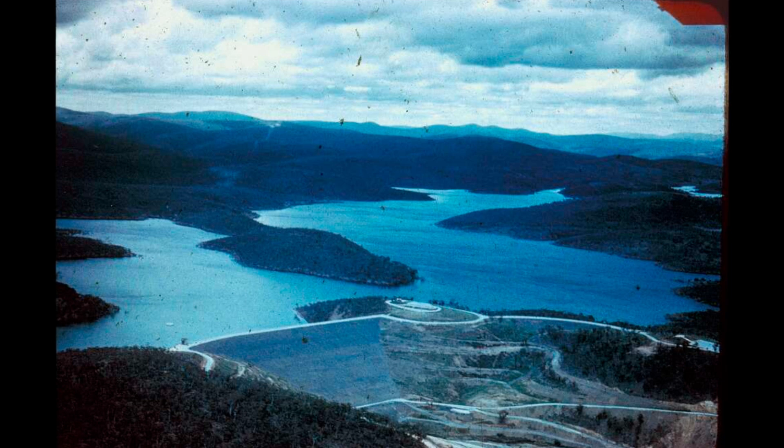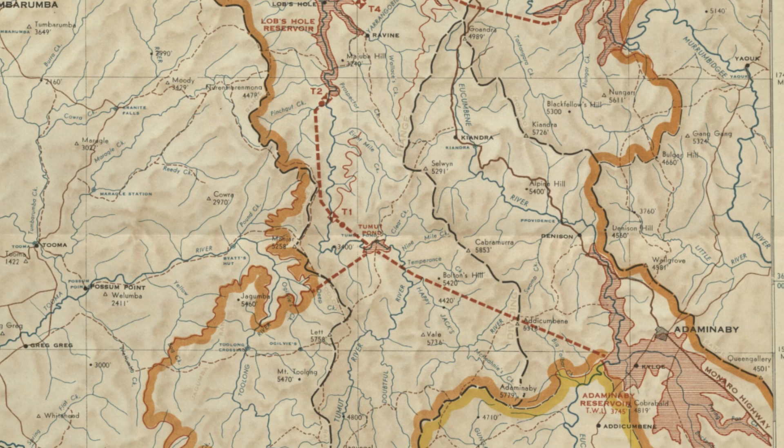The Eucumbene dam site, shown here, will be the final agreed location some 7 kilometres approximately downstream on the Eucumbene River from the initial proposed location in earlier plans. The earth-filled dam works would be underway as of 1956, and filling of the reservoir would take place in advance of the dam itself reaching its final crest height in 1958.

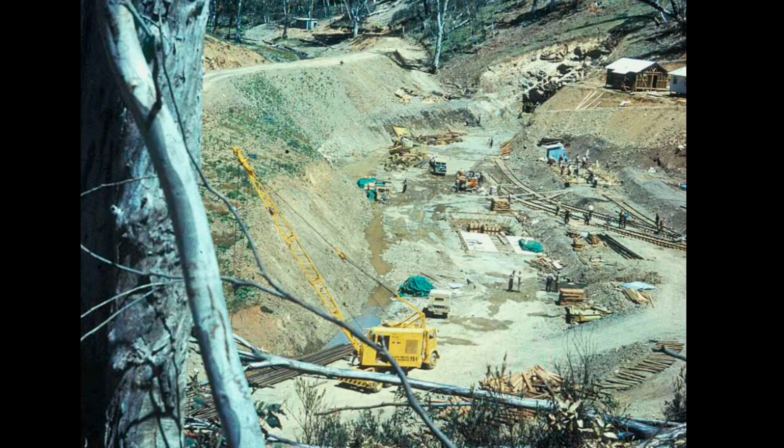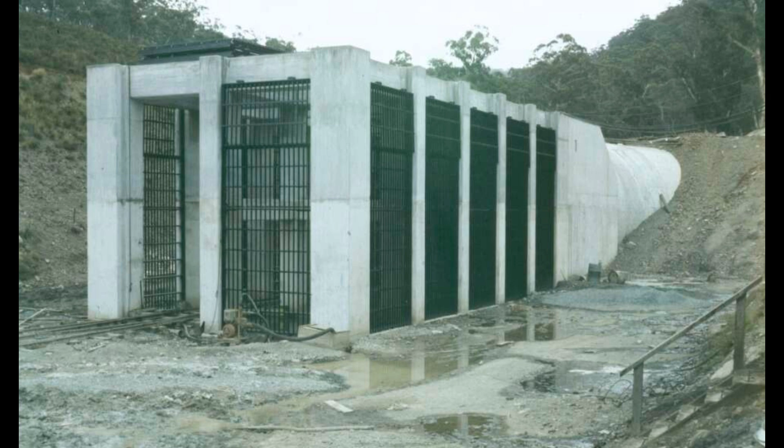For water to leave the lake and enter the Snowy Tumut system, an outlet portal and control structure were built on the Tooma Inlet, approximately 6 kilometres north of the dam site. This structure would serve both as an outlet and inlet to Lake Eucumbene, with a nominal second outlet portal and control structure being provided downstream for its connection with Tumut Pond Dam.

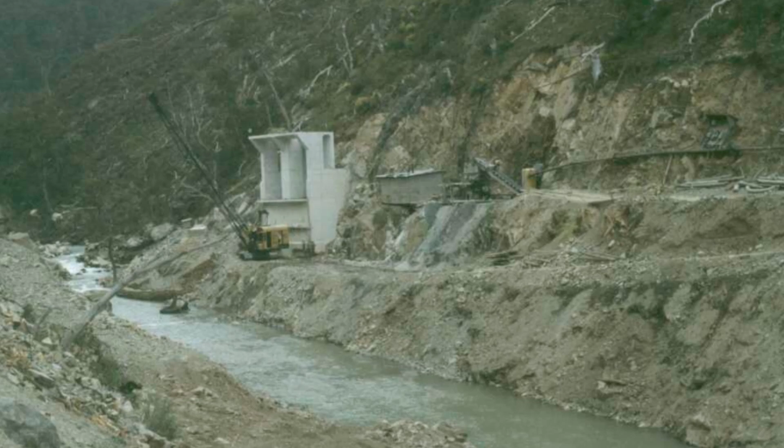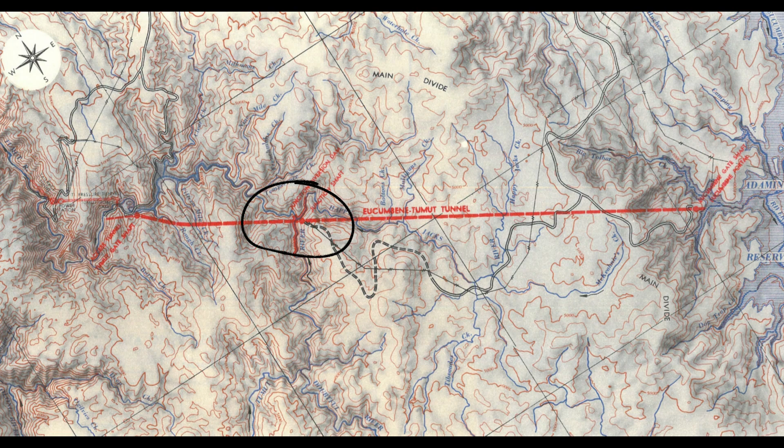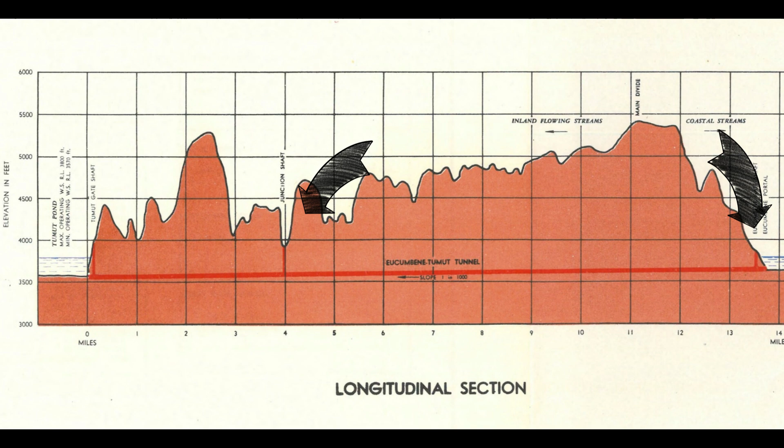The reason the Tooma Inlet structure serves as both an inlet and outlet structure is due to the junction shaft being located 3/4 along the Eucumbene-Tumut tunnel alignment. This intermediate intake is at a much higher elevation than both Tumut Pond and Lake Eucumbene, permitting reverse flows to occur.

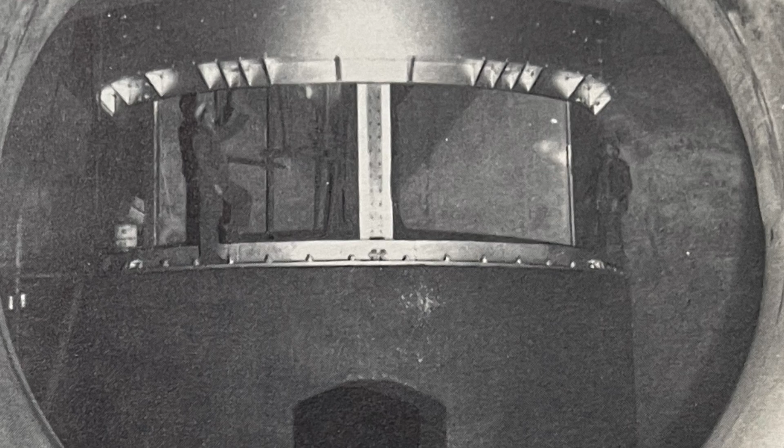Junction shaft and its cylindrical control gate is coupled with Happy Jacks Dam, which holds back the Tumut River in its upper reaches. Without this intermediate intake, high seasonal flows would likely cause Tumut Pond downstream to overflow via its spillway, and water available for long-term storage would be lost through uncontrolled flow through the lower scheme.

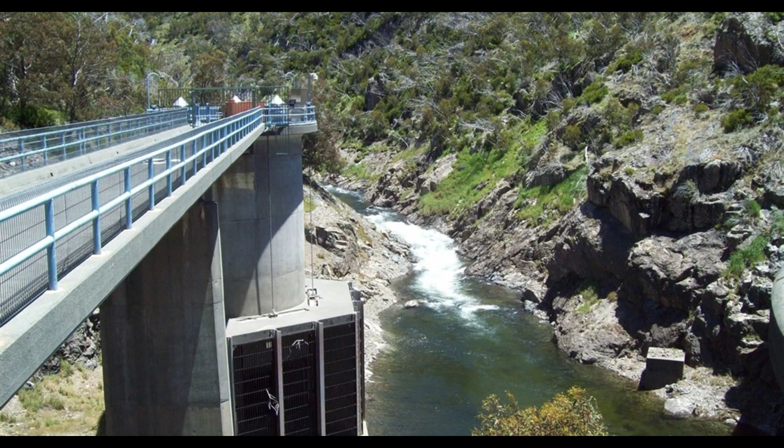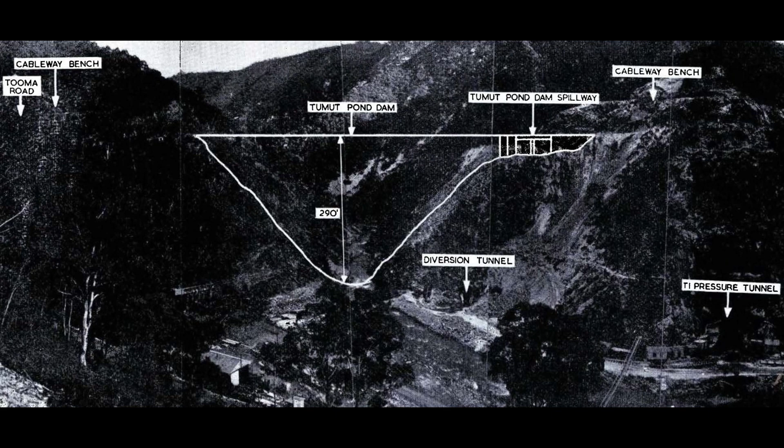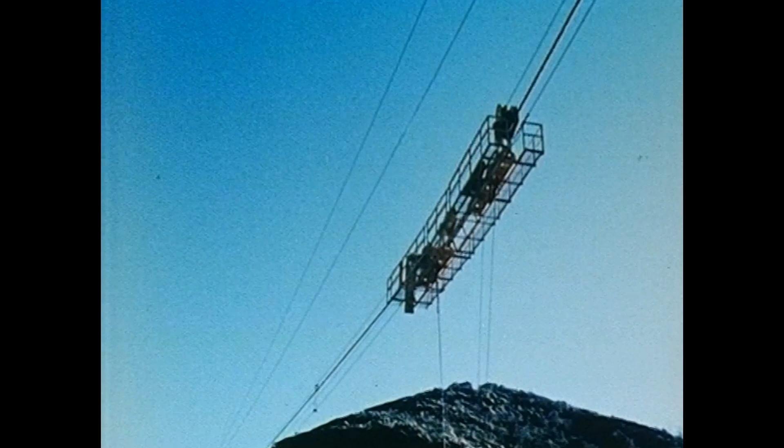One year after commencing construction of Eucumbene Dam, Tumut Pond Dam's construction would take place in 1955. This dam would impound the Tumut River below Happy Jacks Dam and create the storage which would feed the first power station within the Snowy Tumut scheme, Tumut 1. Tumut Pond Dam would be a concrete arch dam similar in nature to that of Hoover Dam, but to only a fraction of the scale.

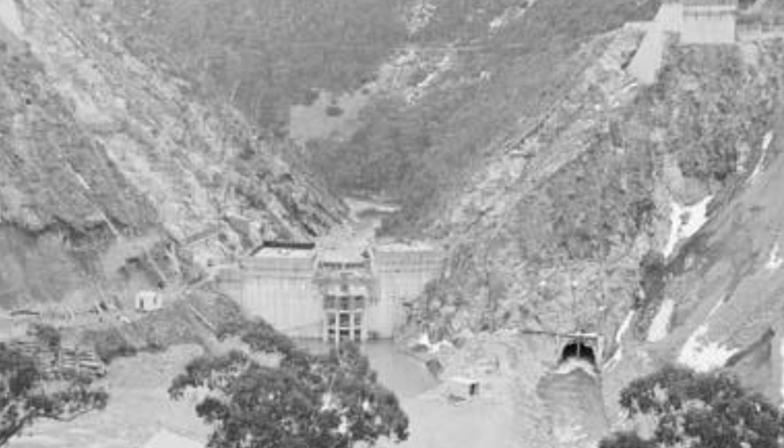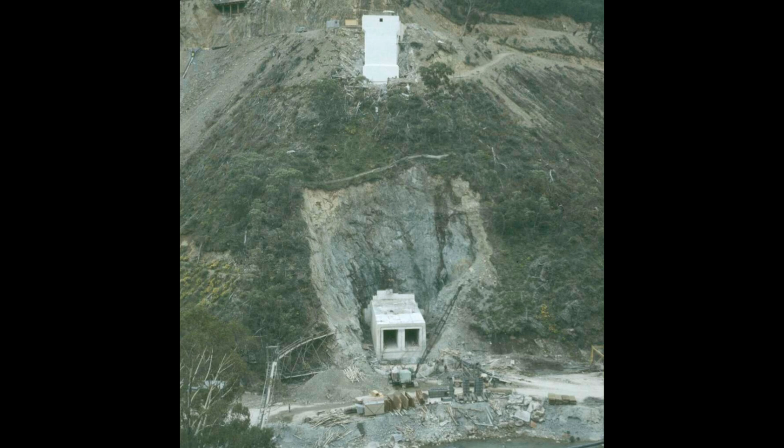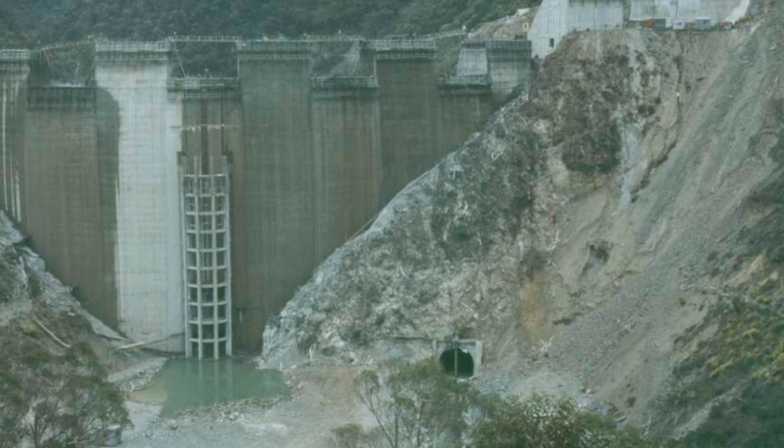And like all other storages, it would require a diversion tunnel be driven through the right side abutment to permit construction to commence. Further upstream of this diversion tunnel, works would also start on driving the outlet tunnel and building the control structure from the Tumut Pond storage towards the Tumut 1 power station below ground, some 2.5 kilometres downstream under the mountain range. Work on the dam itself would progress over 4 years, block by block, growing it upwards to its final height of 86 metres.

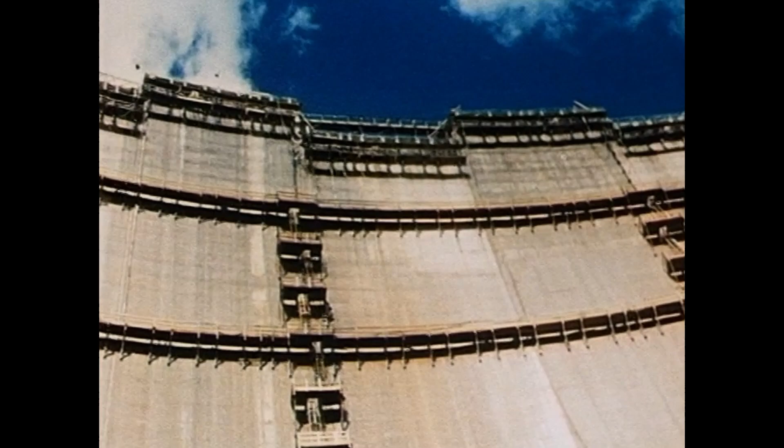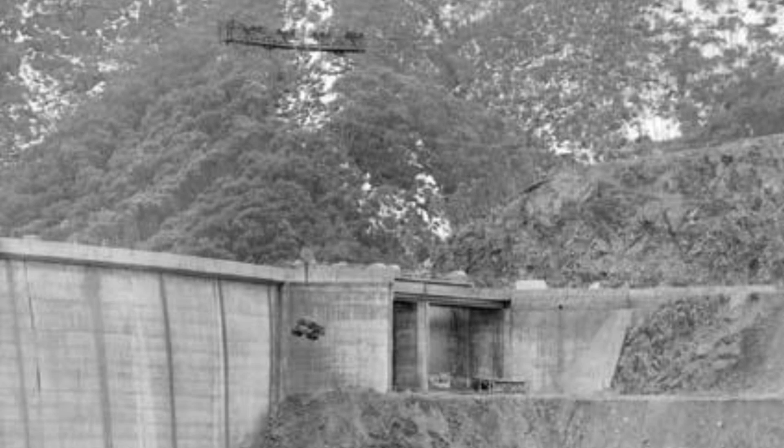The cable transport system would ferry everything from workers, concrete, and even large plant equipment such as this bulldozer across the valley. The image begins to show the scale of the dam and the associated works.

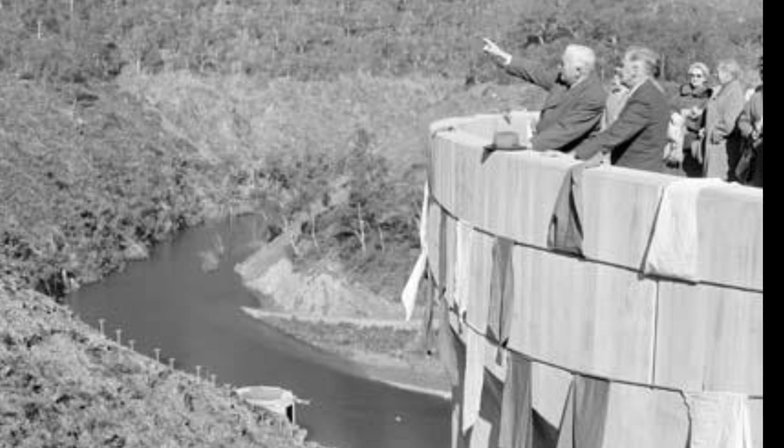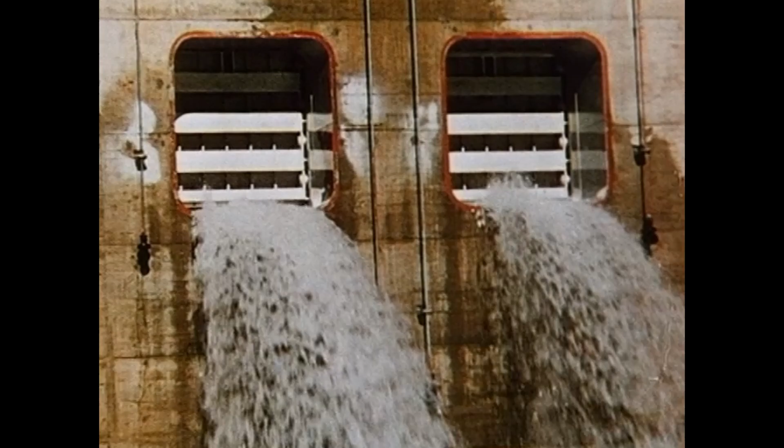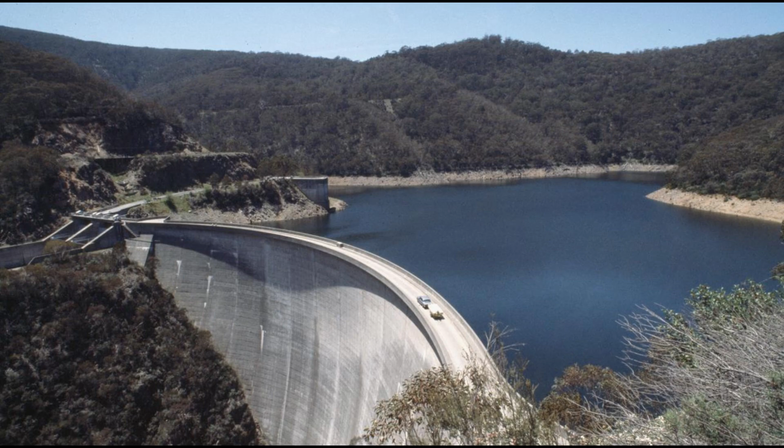By late 1958, Tumut Pond Dam was in a position to hold its opening ceremony, and the outlet gates were closed to enable filling to begin whilst minor works were finished. Here, Prime Minister Robert Menzies pulls a lever to close the outlet gates and commence storage operations. The finished dam not only holds back the Tumut River, but serves as a key access road between the townships of Cabramurra and Khancoban to the south.

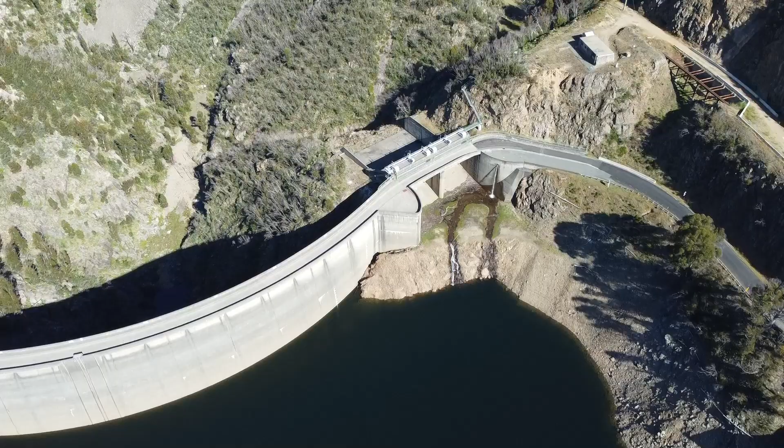The dam itself is a visual marvel and impressive to visit when travelling through the Snowy Mountains, with the outlet structure observable from the dam wall and spillway gates within easy walking distance of parking at the site.

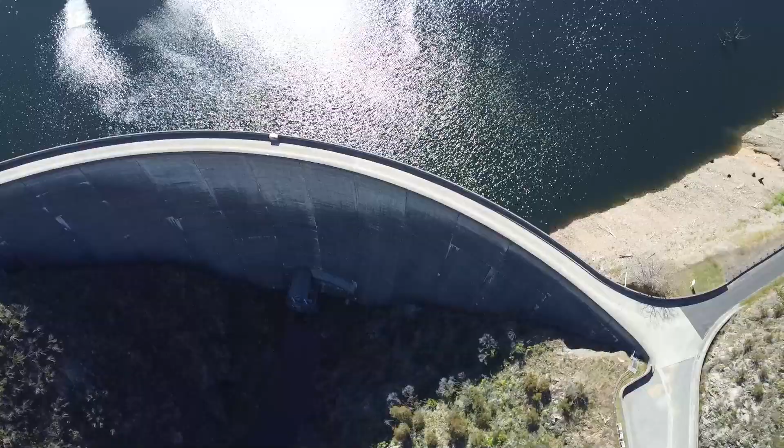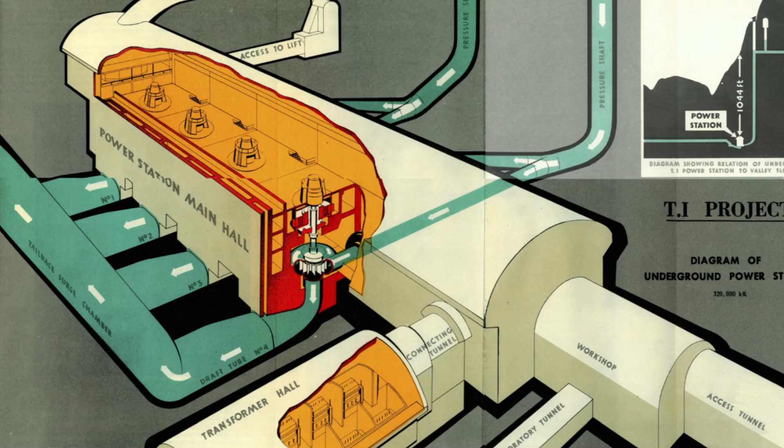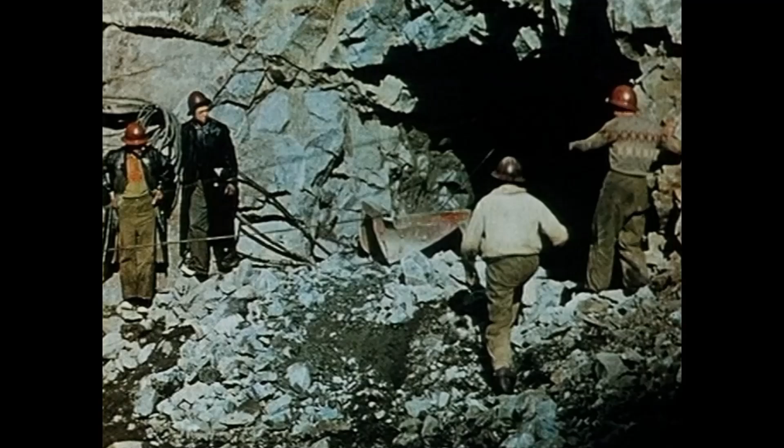Early works had commenced prior to 1955, with an investigational tunnel being driven into the mountain range to understand geological conditions and support its design development.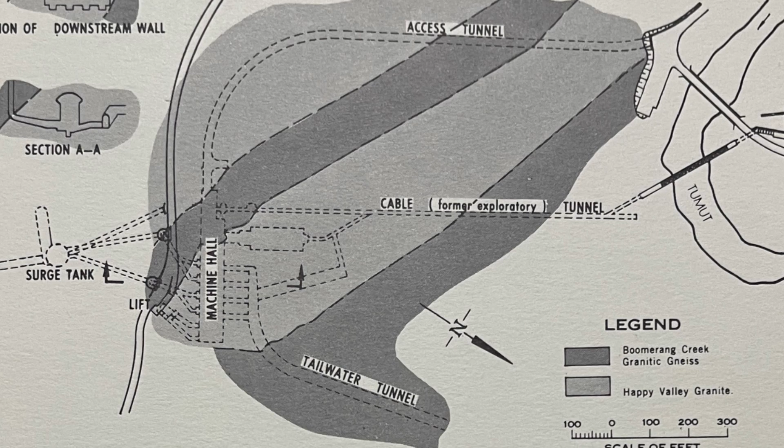It turned out that after initial excavation into the machine hall began, ground conditions were not favourable, and a decision was made to extend the machine hall a further 30 metres into Happy Valley granite, which was more sound, as can be seen in this diagram.

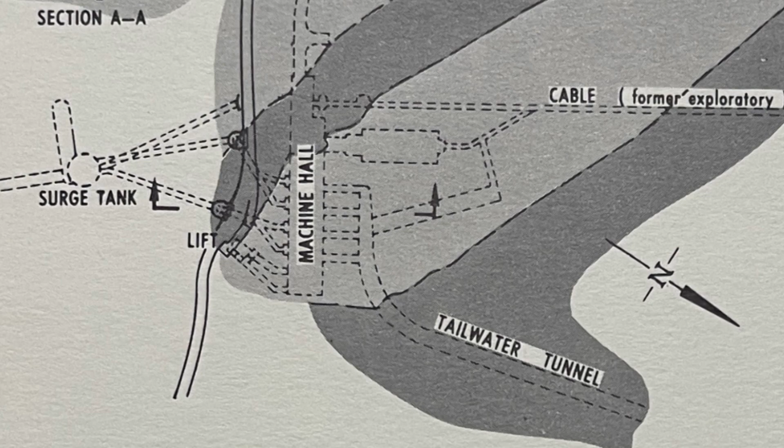Vertical pressure shafts were used due to them requiring the least excavation and material for lining, and a surge tank arrangement was provided upstream of control gates leading into the vertical shafts.

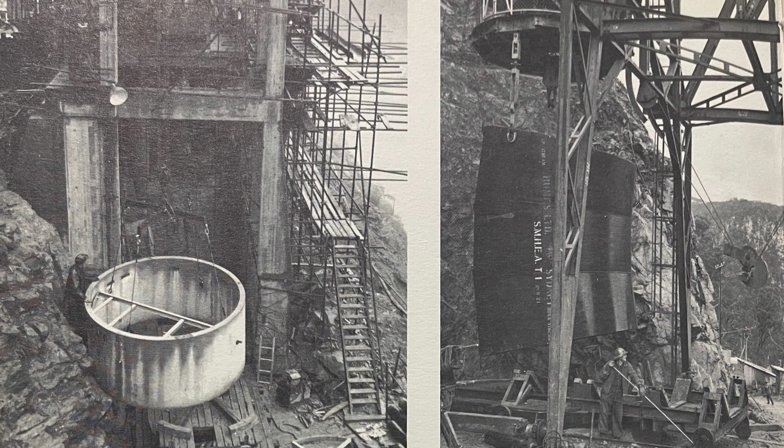3 shafts were driven, 2 to serve as pressure pipelines, the third to serve as a ventilation and lift access shaft. In the unlikely event of Tumut 1 flooding due to the Tumut River backflowing via the tail water tunnel, the upper region of this ventilation shaft can be used for emergency purposes, as indicated in this hand-drawn diagram.

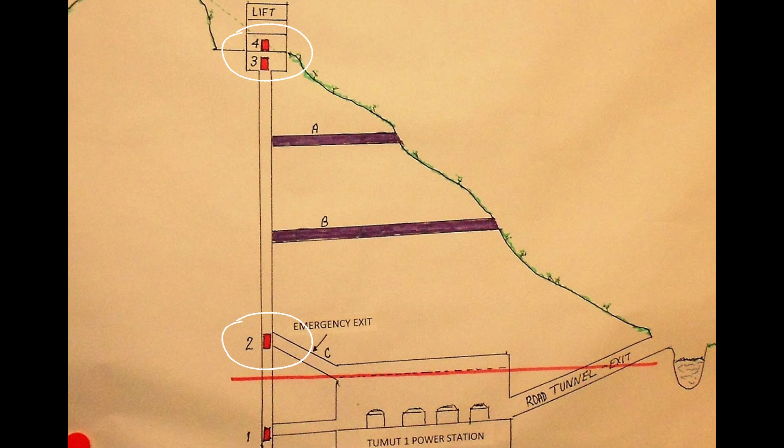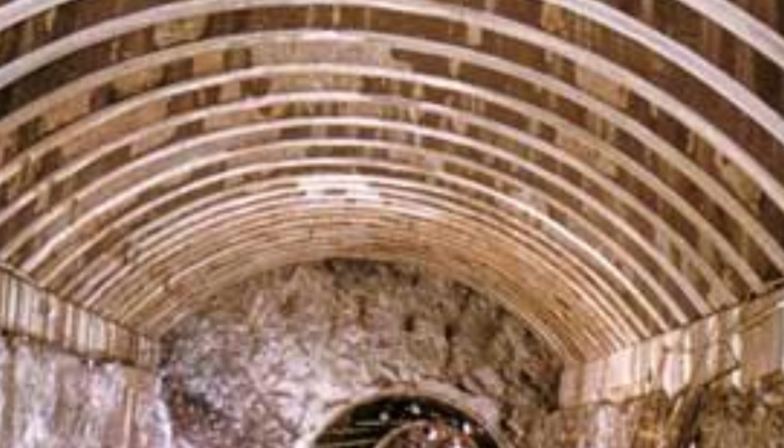Tumut 1 being an underground power station meant that supporting the roof would be the highest priority during early construction. A reinforced concrete rib arrangement was installed shortly after excavation permitted. Rock bolting was also used to aid this supporting system, and rock bolting as part of the scheme was greatly pioneered and evolved to suit the conditions.

With the roof structure stable, blasting and excavation of the material occupying the space for the turbines and generator systems was progressed, along with the inlet and outlet connections to the pressure tunnel and draft tubes leading to the tailwater tunnel. As seen here, the scale of the equipment and structures was epic, and T1's construction, along with its tunnels, would take 4 years to conclude.

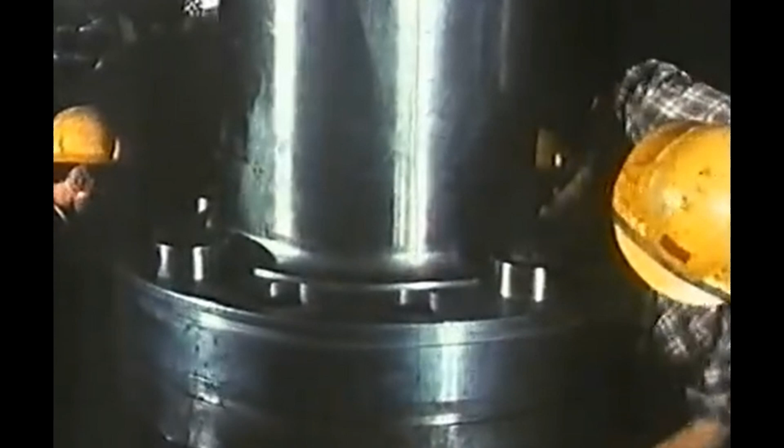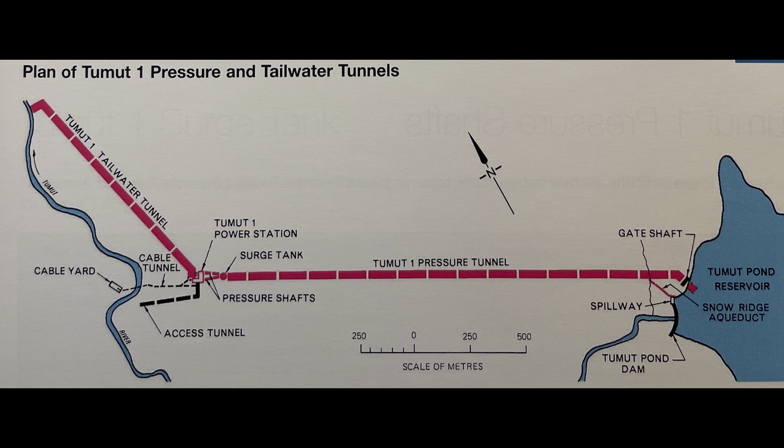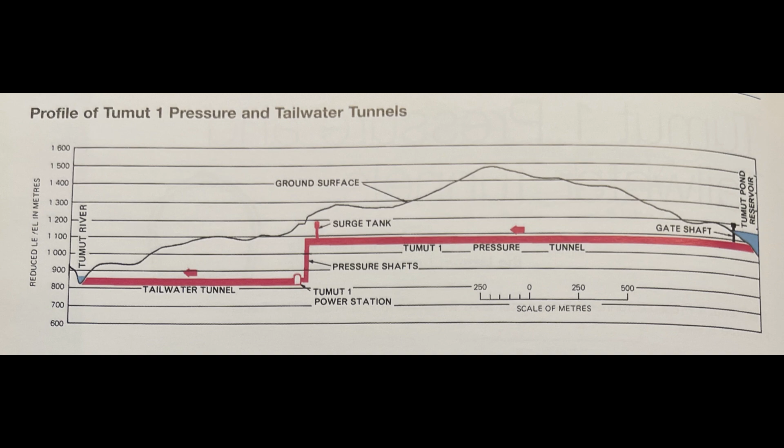So now we've covered approximately the first 9 years of the scheme's construction, with elements of the Upper Snowy development, i.e. Guthega, being commissioned alongside the early beginnings of the Upper Tumut development, now well underway. By 1959, both Guthega and the Tumut 1 power stations would contribute approximately 380 megawatts of generation capacity to the New South Wales and Canberra electrical networks, further showing the Australian public and their elected politicians that progress was taking place at a considerable speed against their investment.

Naturally, though, much more work was still to come, with ongoing efforts still being put into the remaining components of the Upper Tumut development, i.e. the Tumut 2 Power Station and Dam, Tooma Dam and Tantangara Dam, alongside the trans-mountain tunnels and control systems, which would interlink them all, needing to yet be completed.

We'll cover these in the next episode, looking at the overlapping years between 1958 and 1962, where a further 280 megawatts of generation capacity would be brought into use across the Snowy scheme, raising the scheme's total to approximately 660 megawatts. Thank you once again for watching, and please look out for the next episode in this series, exploring and celebrating the Snowy scheme and its 75th anniversary.